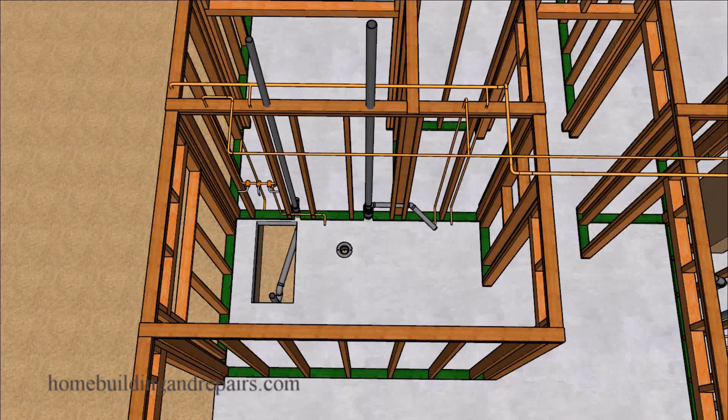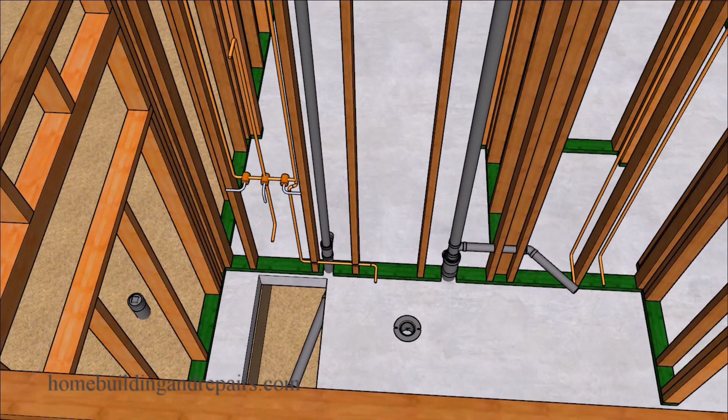In this video, I will provide you with a few things to think about if you're going to be changing out a bathtub to a shower. The first thing I want to take a look at is the water supply valve, and you might need to replace it depending upon its design.

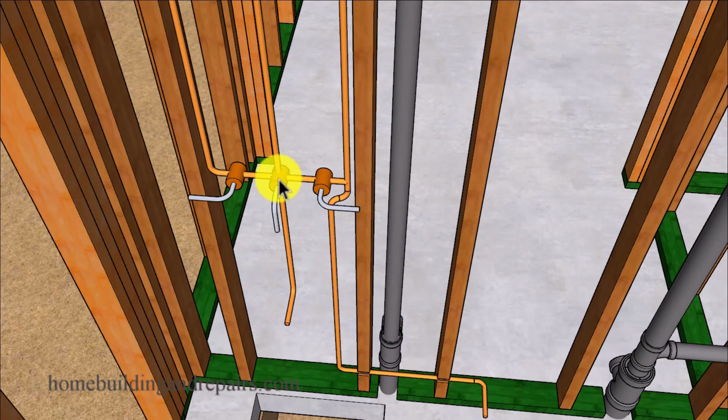Sometimes with a bathtub, you're going to have a bathtub shower unit, which has a lower tub spout and a shower head on top. However, if you just have a bathtub spout at the bottom without a shower head on top, you'll need to add this line here, and remove this one if you're not going to need it anymore. So this is what it would look like if you had a shower water supply assembly.

Another thing you'll need to consider is whether or not you're going to be increasing the water flow out of the shower head. If this is the case, you might need to install a different valve setup and larger water supply lines.

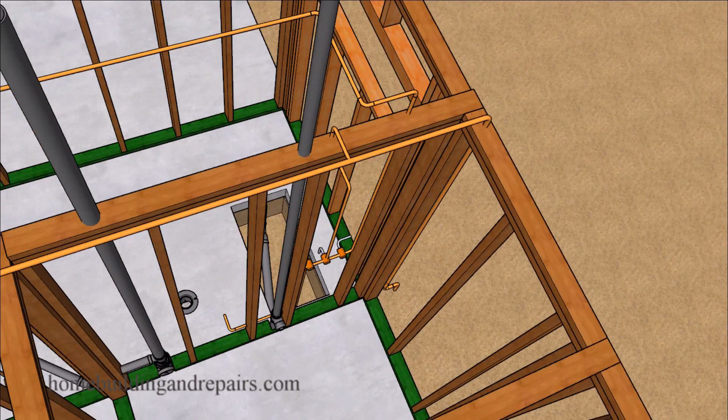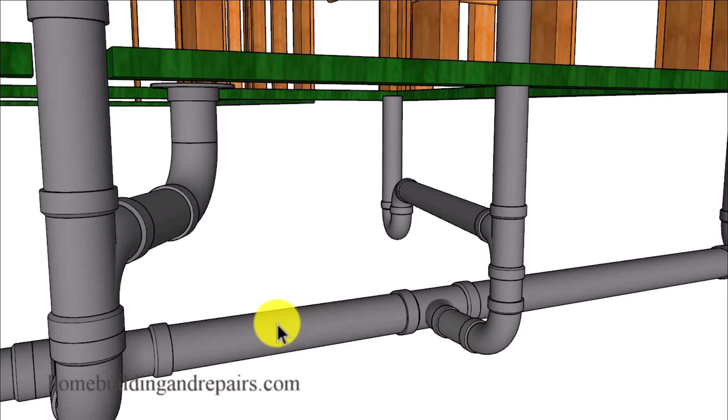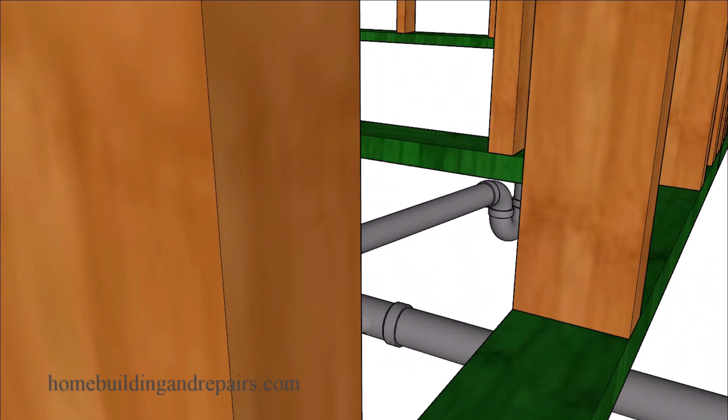Next, let's take a look at what the drain pipe setup would look like if we had an existing shower drain and not a bathtub. That might have a 2-inch clean out along with 2-inch drain lines. You'll need a 2-inch drain line going all the way from the shower down to the drain line. So you might have a 2-inch drain going into a 3-inch or 4-inch pipe, whereas in a bathtub, you'll have a 1.5 inch pipe. That's where the problem starts in this video.

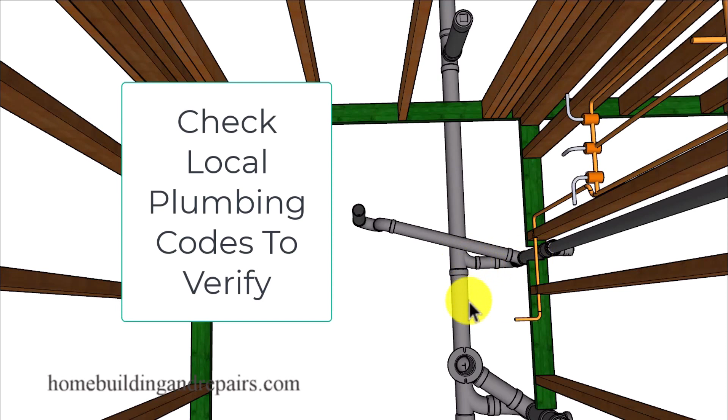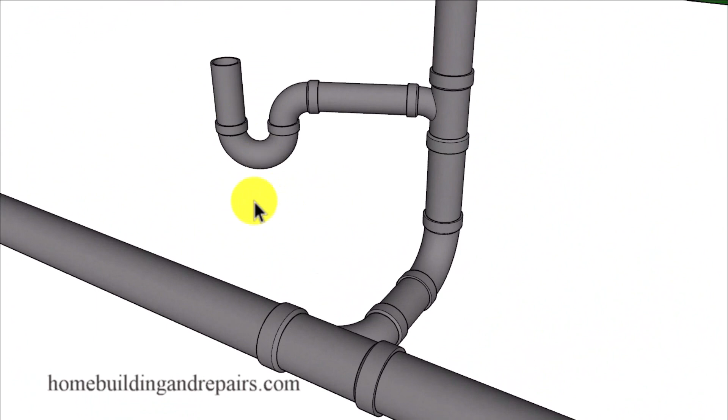So 2 inches is code, a 2-inch pipe all the way down to eventually run into a larger pipe. However, that won't be the same setup for your bathtub. Your bathtub is usually going to have a 1.5 inch drain line. However, the 1.5 inch can drain into a 2-inch pipe, and the 2-inch pipe can drain into a larger pipe like we have here. So here we have 2 inches going all the way up to the clean out and a sanitary tee with a 1.5 inch connection coming out of the side.

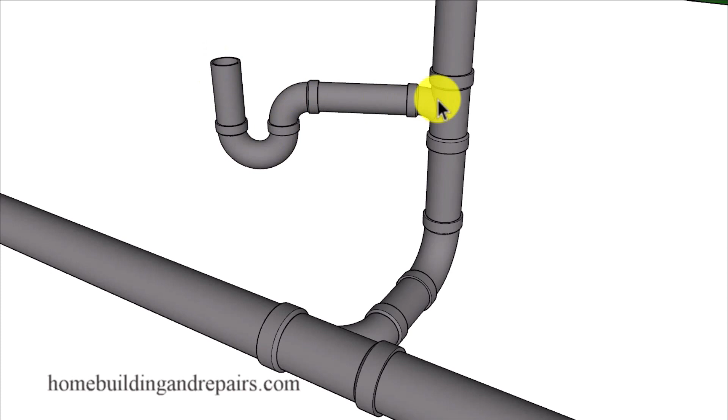This is actually the setup I like to do if I can. I like to have the 1.5 inch going into a 2-inch. However, the building codes don't suggest that is necessary. So again, 2-inch line going up to a clean out, 1.5 inch vent going out through the roof.

So this provides us with one example. Your bathroom could be different. Feel free to email me pictures of your bathroom drainage system, and I might not be able to make a video immediately. However, I will be able to add it to this video series in the future.

Here's an example of where the clean out is 2 inches. 2 inches going down, 1.5 inch coming out of the top of the clean out in this example here.

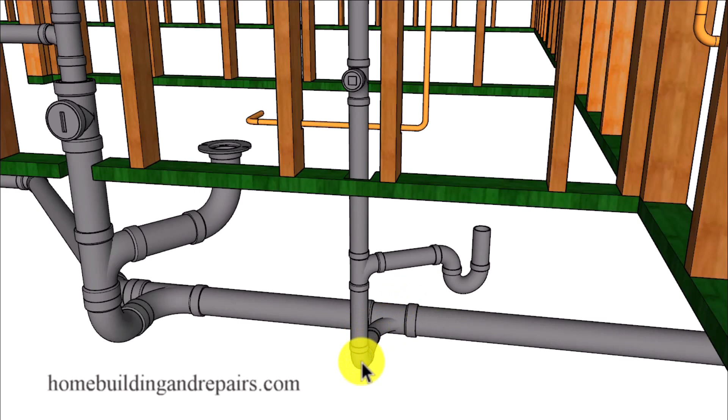Next up, let's take a look at a drainage setup where we have a 1.5 inch pipe going all the way down to the drain line or the next larger sized pipe. So everything coming out of this combo fitting is 1.5 inch all the way up to the drain for a bathtub drainage setup.

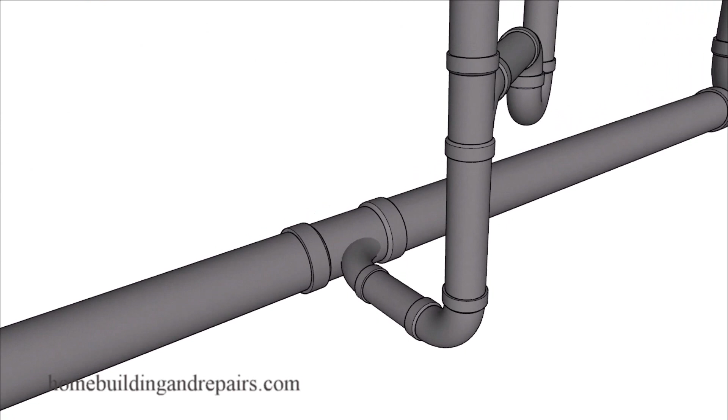This is probably what you're going to be dealing with. I hate to say it, because most plumbers are going to be trying to save a few dollars here and there, especially if your house is a tract-built house and not a custom home. So pay attention, because if you have a 1.5 inch drain line and you want to install a shower, the building code is going to require a 2-inch drain, which means you're going to have to change out this combo fitting, and you might even need to relocate it. But that's the main reason why I'm making this video, to provide you with this information.

Most do-it-yourselfers are going to take the easiest route possible, which means tying into the 1.5 inch line. I'm not about to suggest that won't work. However, I am going to suggest that it's probably not going to meet your local building codes.

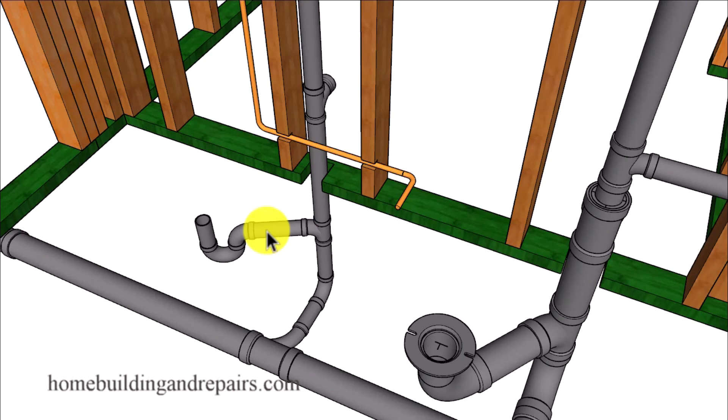The first thing we're going to want to do is cut out the plumbing pipes that we are going to need to modify. I won't be able to walk you through that process or tell you exactly where to make these cuts, so that you don't overcut or have to cut something again, especially if you're dealing with a cast iron pipe. There's a good chance you're going to need to use couplings up here at the vent, down here at the drain line, and whether or not you choose to use glue-on couplings.

If you're working with PVC or ABS or another material that can be glued together, then you could use these types of fittings. Otherwise, you might consider using rubber fittings with hose clamps. That will be what you use if you're tying ABS or PVC into cast iron.

In this example, I'm going to provide you with another way you can connect the 2-inch drain line to the larger pipe, using a fitting that will have a 45-degree angle coming off of it. According to the International Building Code book, either one of these methods will work.

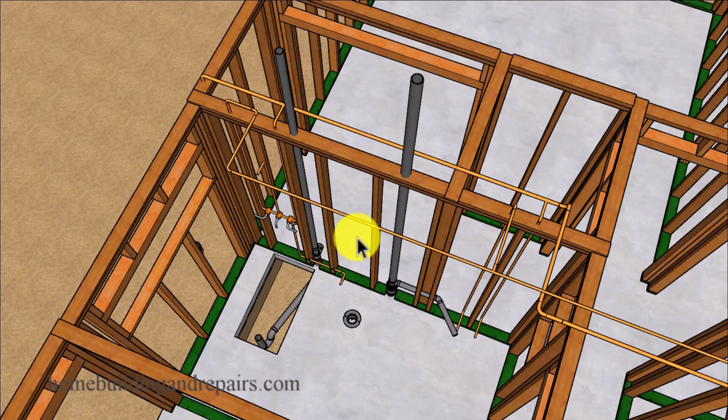I think the last bit of advice I could provide you with when doing something like this is that it's probably not going to be easy, because you don't know where your plumbing pipes are going to be located. For example, you might need to go into the next room or further over in each direction, including this direction here, if you don't know what the plumbing looks like underneath the concrete slab.

In a raised floor, you're probably going to get a pretty good idea what the plumbing looks like by crawling underneath the house or cutting up the flooring.

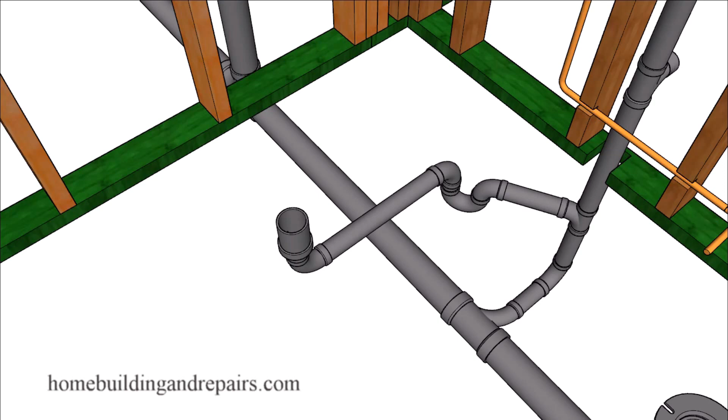Now, before I end the video, I want to point out another thing that is not going to meet code. However, it's something I've seen done before. I do not suggest that you go from the trap this way and then use a reducer or an adapter to go up 2 inches.

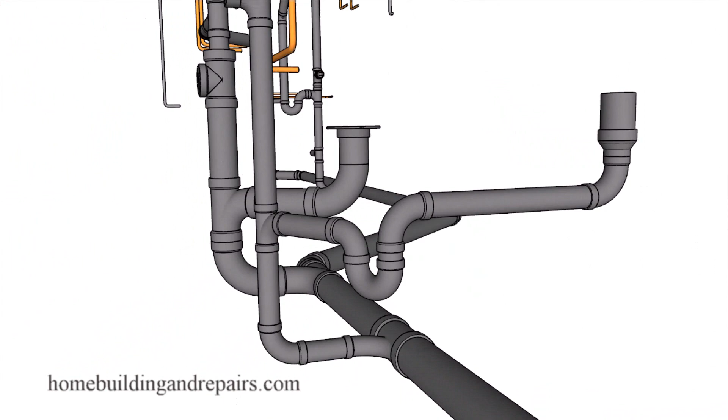So this would be the one example here that I would try to avoid using, unless you just didn't have a choice. And again, you would have to check with your local building codes to see if something like this could be approved for whatever reason.

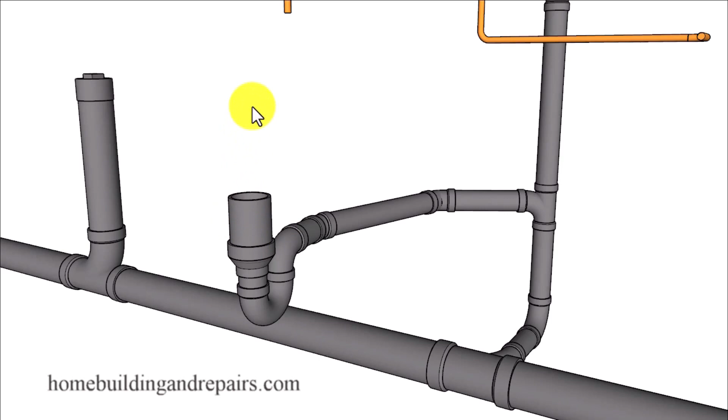And of course, something like this would work a little better. You're going to have a 1.5 inch drain coming up to a 2-inch adapter, something that will allow you to connect most of these shower fittings that are going to require a 2-inch drain line coming up instead of a 1.5 inch drain line. Something like this should work a little bit better than the previous example.

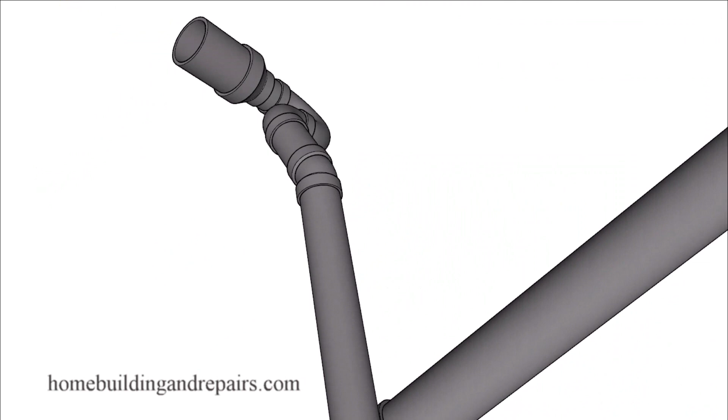Of course, I have no idea how many fittings you would need to make this type of connection. Here we have a 45-degree and a 22.5-degree fitting to make this one here work. And again, I don't think this is going to be approved by your local building department, along with making the 2-inch transition horizontally or laterally.

The reason why you're going to want to avoid using something like this is because the water isn't going to drain out of the pipe. You're going to end up with a situation like this, and over time, sediment could build up in this area here. Whether or not that would eventually become a problem, I don't know, because I've never worked on a house with something like this, so I won't be able to verify that information.

So there it is. Hope you learned something.